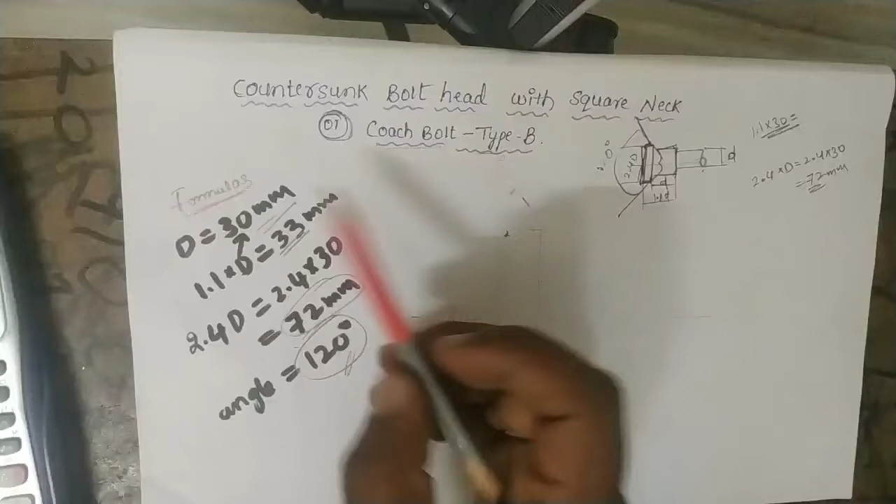Countersunk bolt head with square neck, or coach bolt type B. Both are the same. This is the diagram.

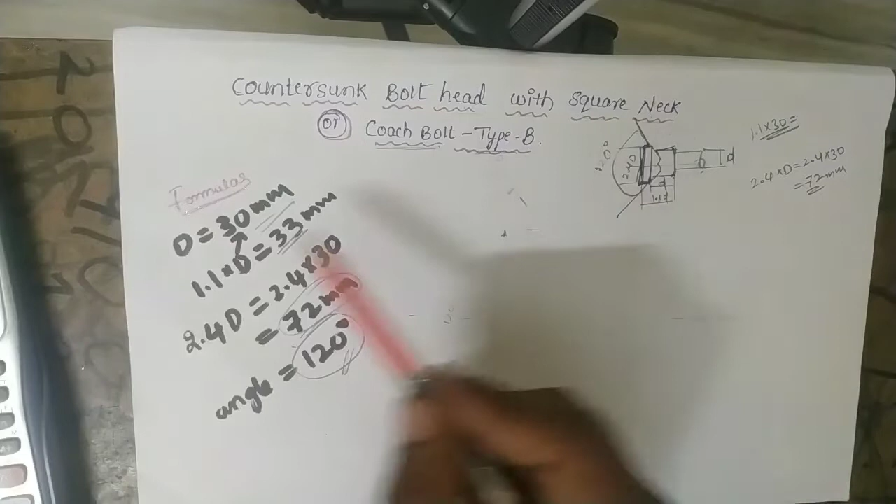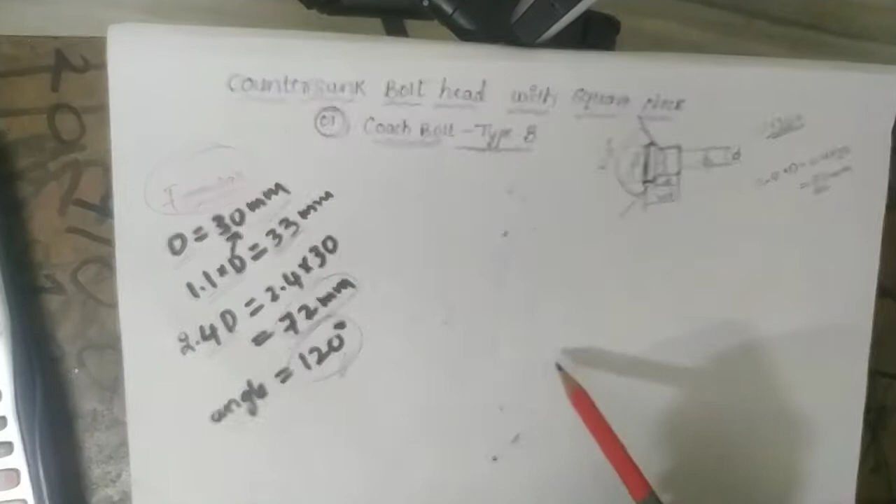Diameter of the bolt equal to 30 mm. From here to here is 1.1 into D, and total height is equal to 2.4 into D. Head height equal to 2.4 into D. So D equal to 30. Substitute D value in 2.4 into D, I got 72, and angle is 120 degrees.

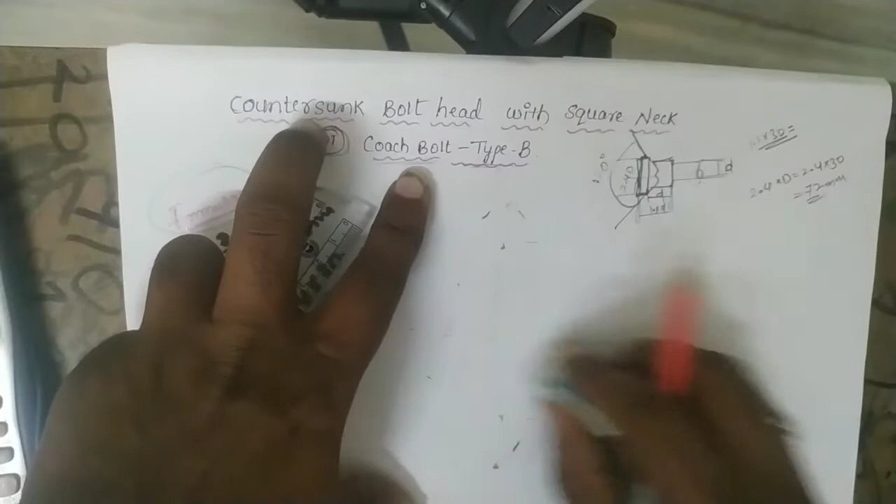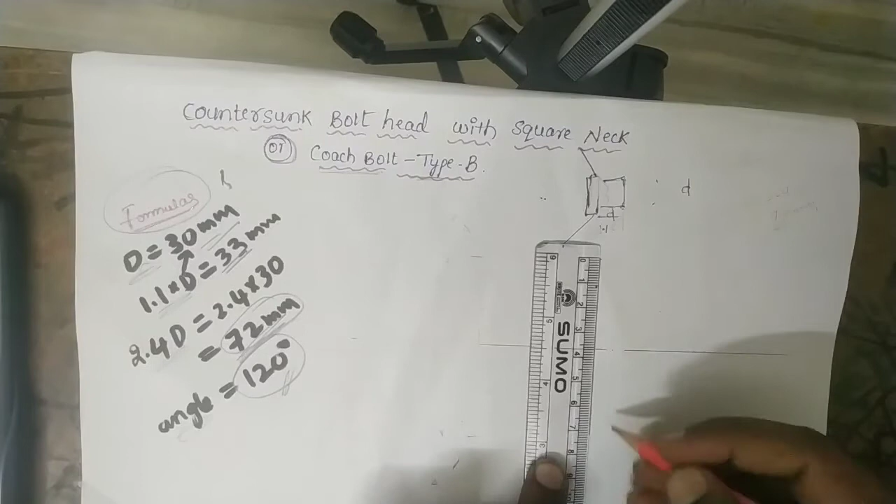This is the constant. See the procedure how to draw the countersunk bolt head with square neck. Draw one center axis, then draw the 72 mm line. Take 36 and 36, total 72. 36 mm above the center axis, and again take 36 mm below center axis.

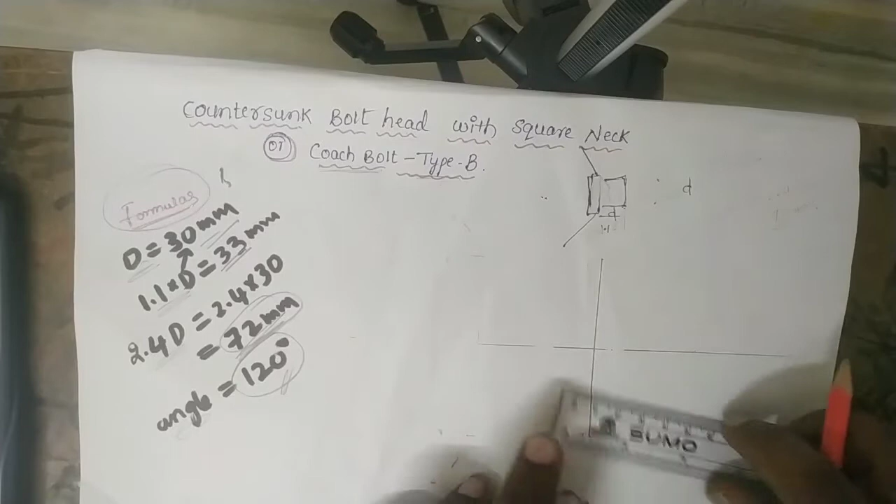This is the width of the head, 3 mm. The width of this head equal to 3 mm, and draw like this.

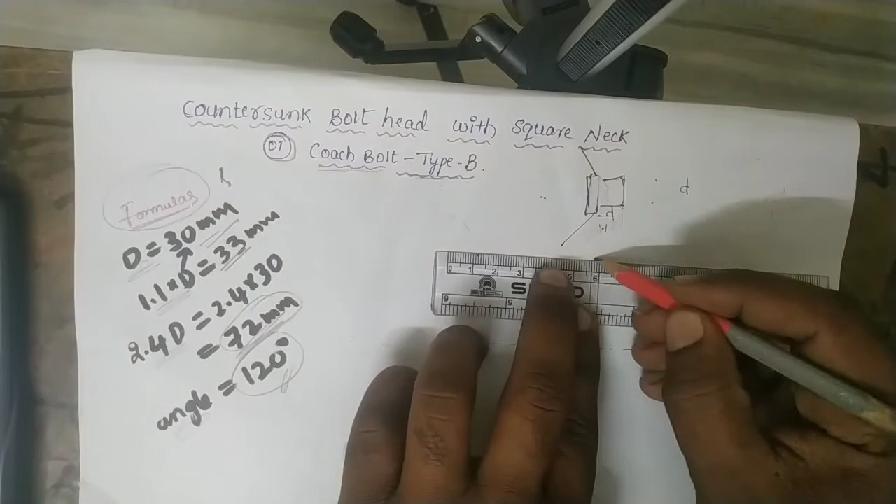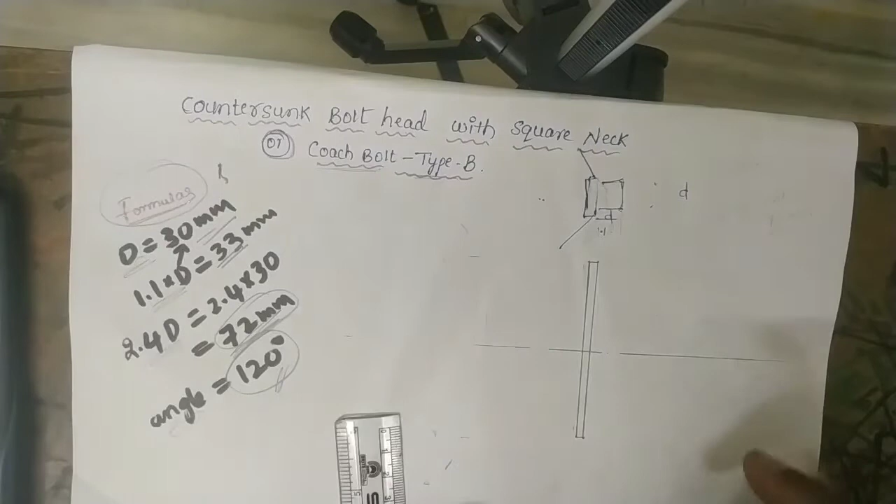So this is the total height, 72 mm. Clear? 2.4 into 30 equals 72.

Take protractor and measure 120 degrees like this. This is the position of protractor. Measure 60 degrees from 90: 1, 2, 3, 4, 5, 6, that is 60.

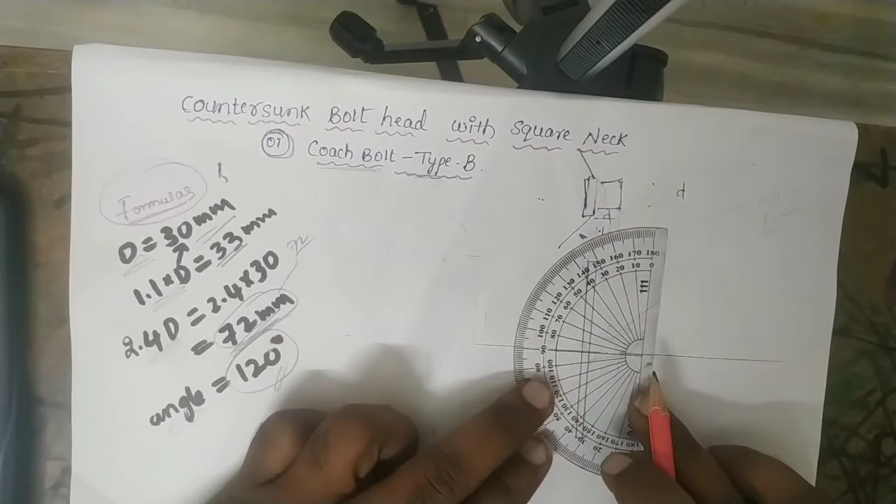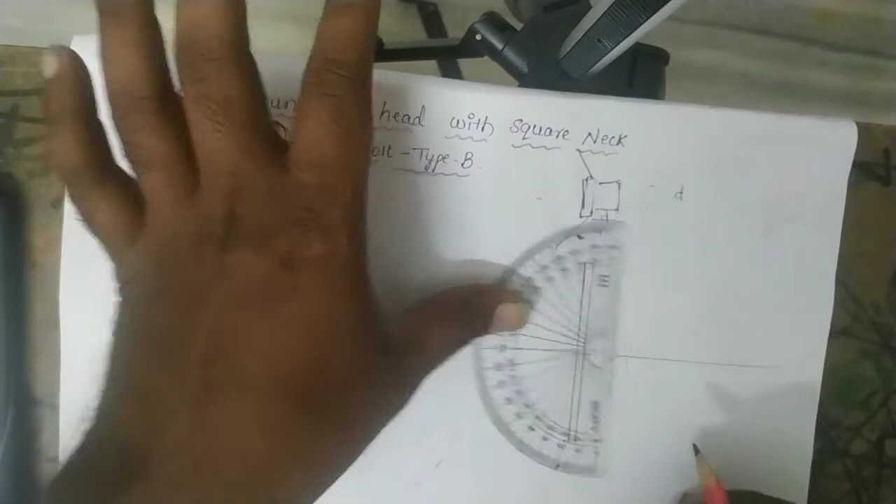Again take 60 below: 10, 20, 30, 40, 50, 60. So 60 plus 60 is 120. Draw like this.

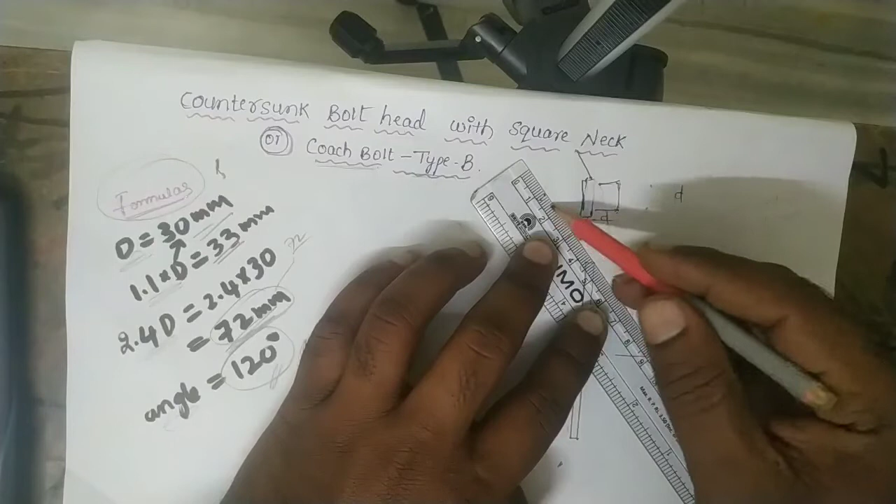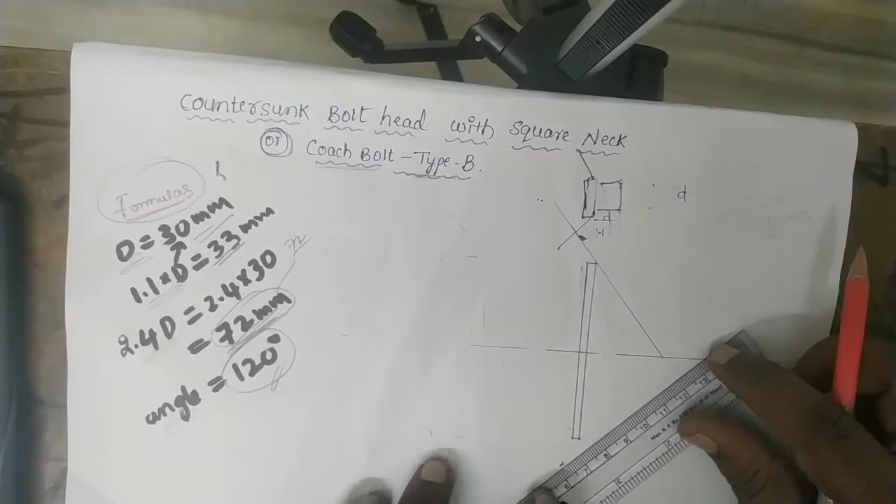This line is passing through the top corner. You should draw a line passing through the top corner like this, and again draw this 60 degrees line passing through the bottom corner like this.

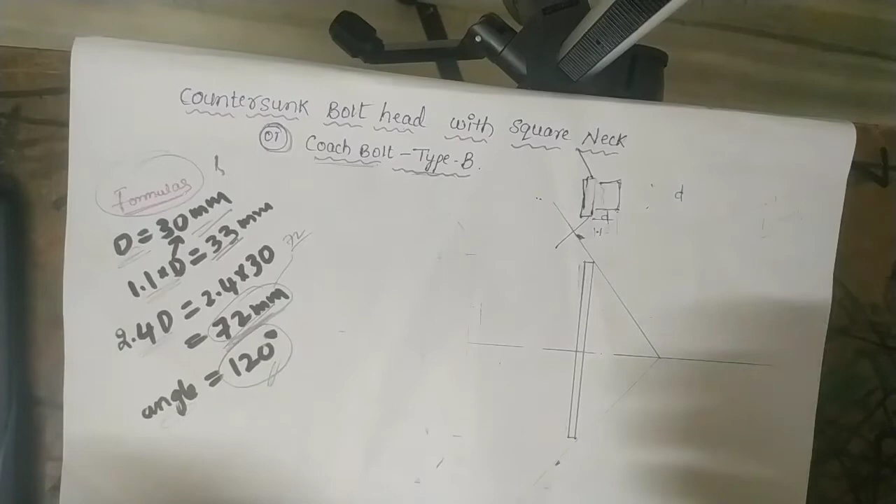From here to here the line must compulsorily touch as you draw it. Meaning you should draw the inclined line passing through both the top and bottom corner.

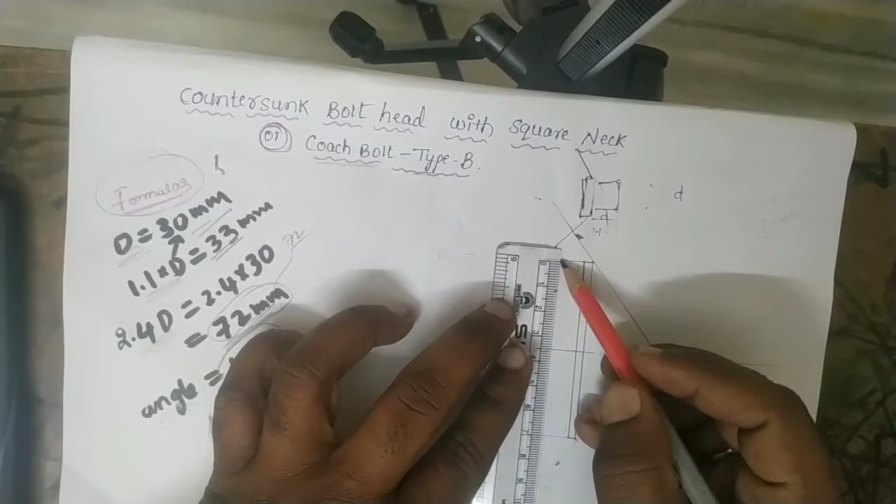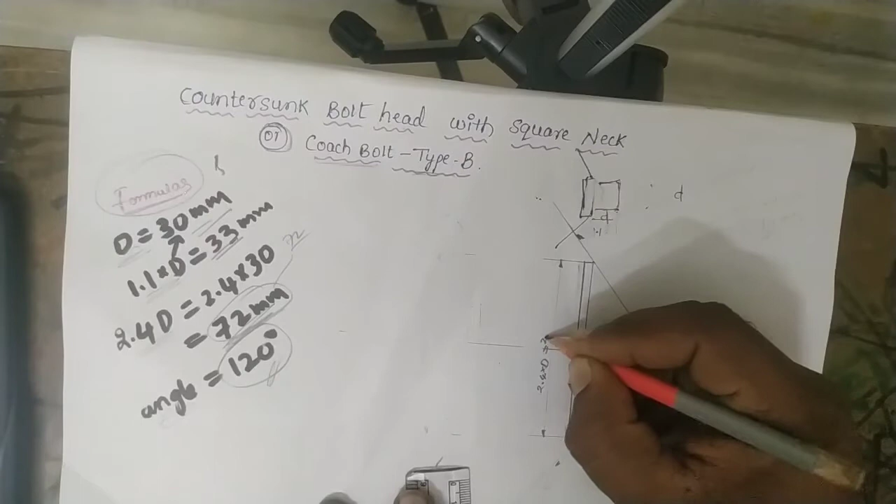This is 2.4 into D, height of head. This is the height of head, 2.4 into D, where D equal to 30. Total height is 72. Take 36 mm from the center axis, center line at the bottom and top.

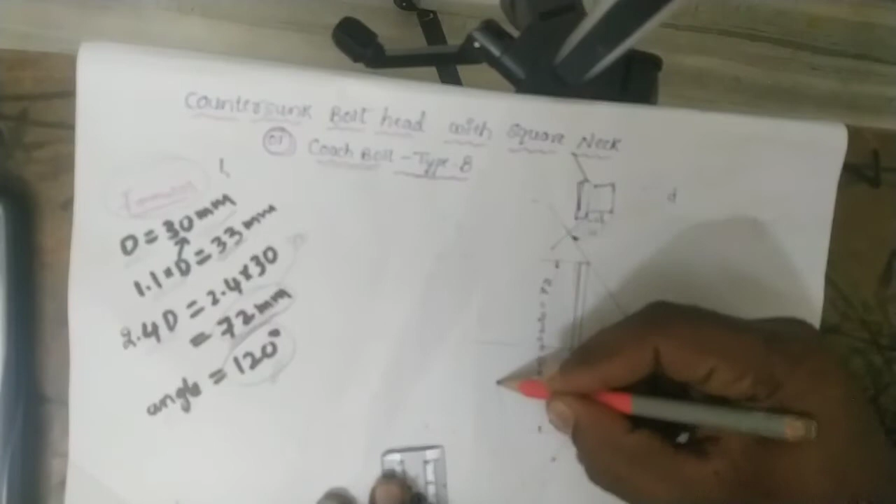So this is the 120 degrees, representation of 120.

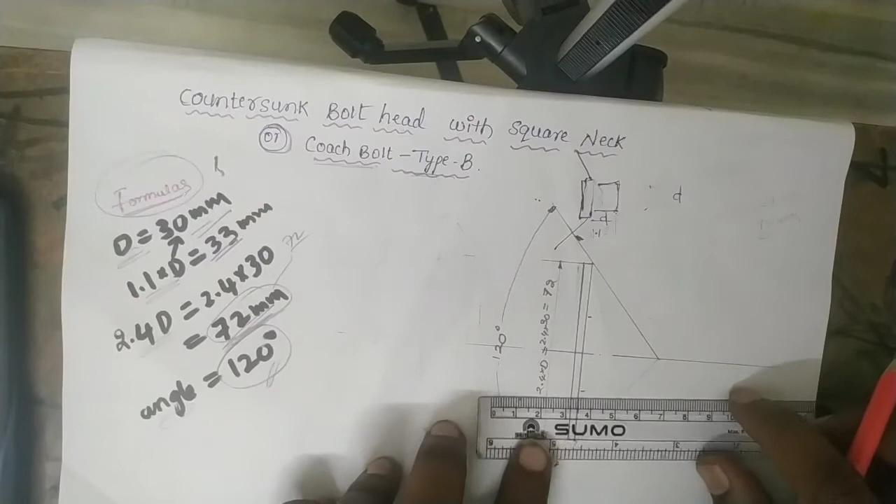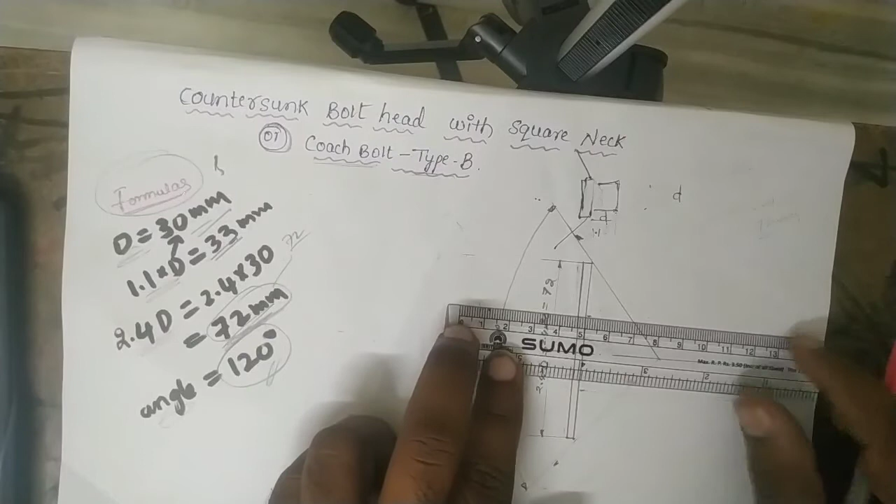Take diameter D dimension, 30 mm. Please take 15 mm above the center line and below the center line. 15 plus 15 equal to 30. Draw horizontal line. There is no given length for this bolt.

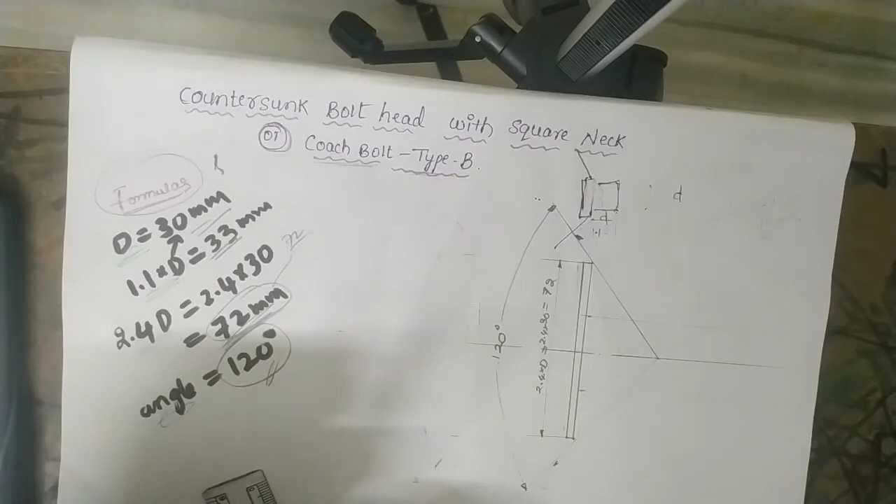Draw two horizontal lines like this. After completion of this one, you need to draw this square portion, but see the procedure how to draw the square portion.

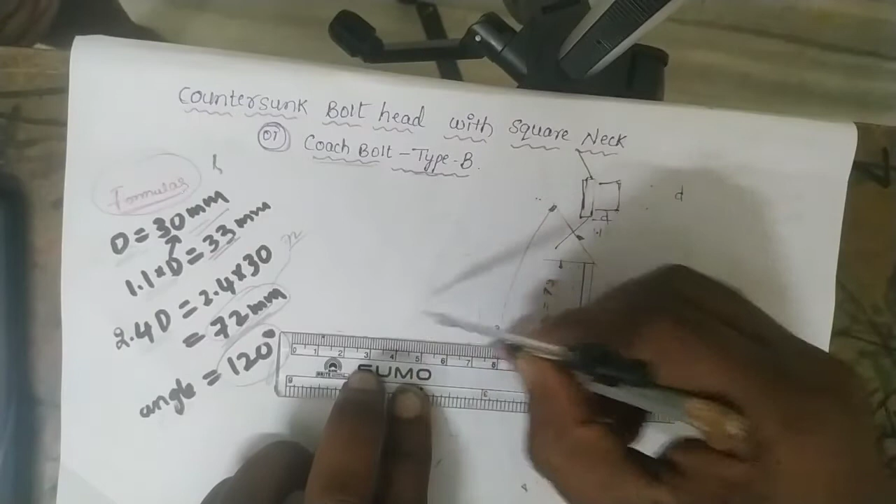Take 36 mm and draw circle, 36 mm radius, and draw circle like this.

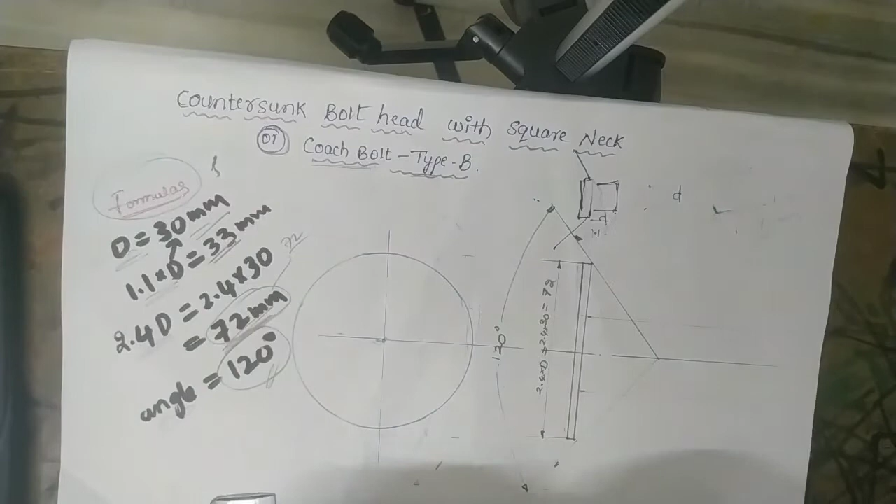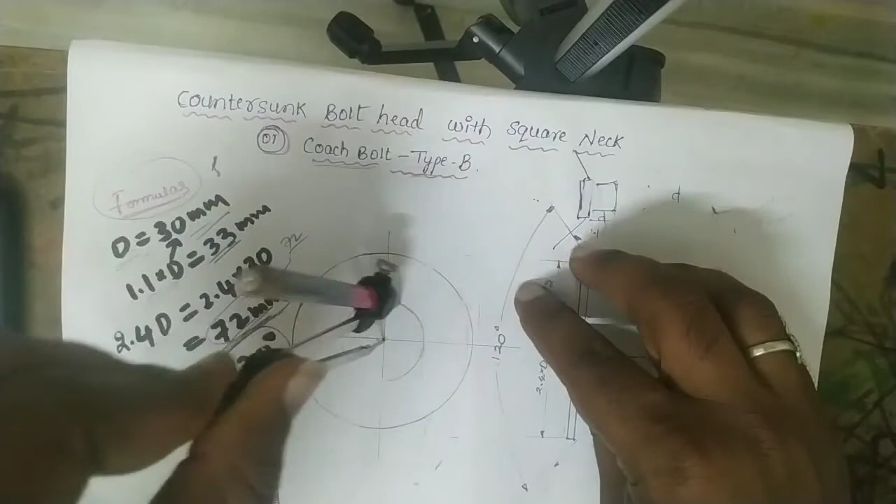Draw the center axis of that circle. After completion of that one, you need to draw another circle. This circle diameter is 30 mm, so take radius 15 mm and draw the circle like this.

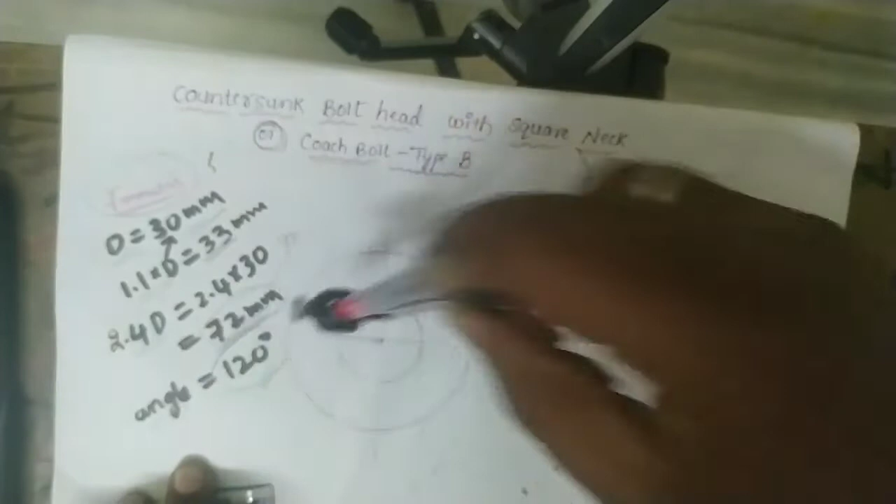So this is the 30 mm diameter circle.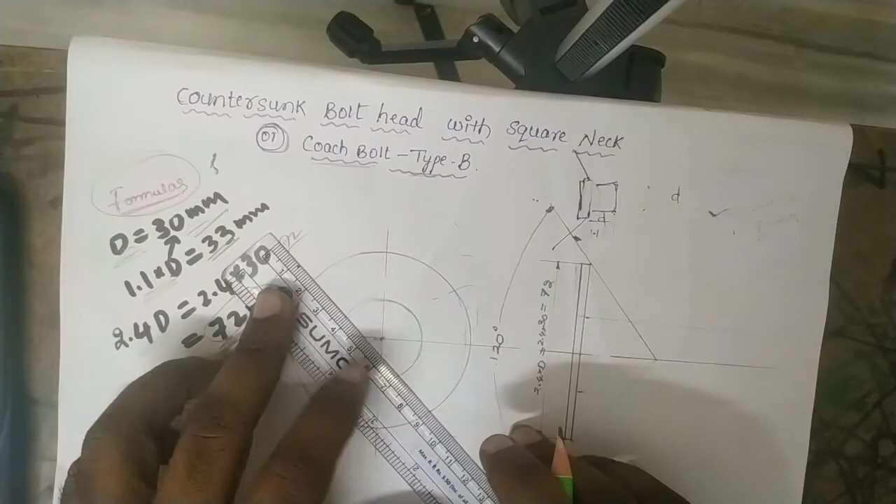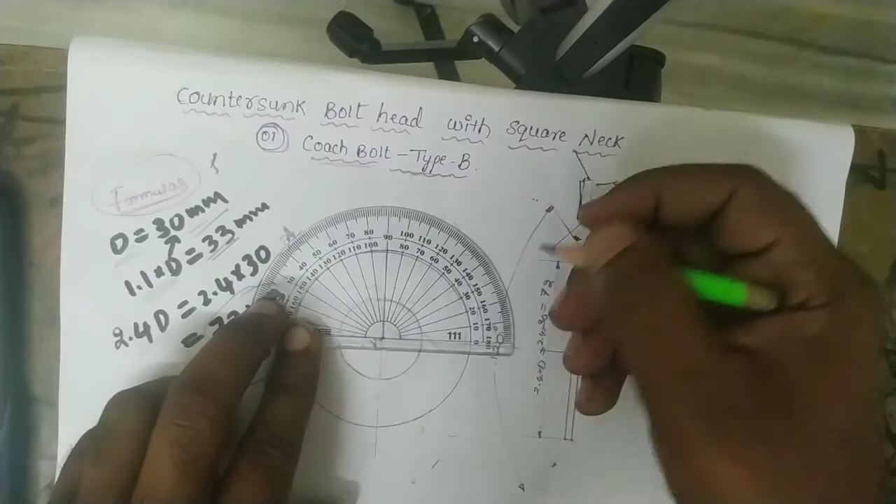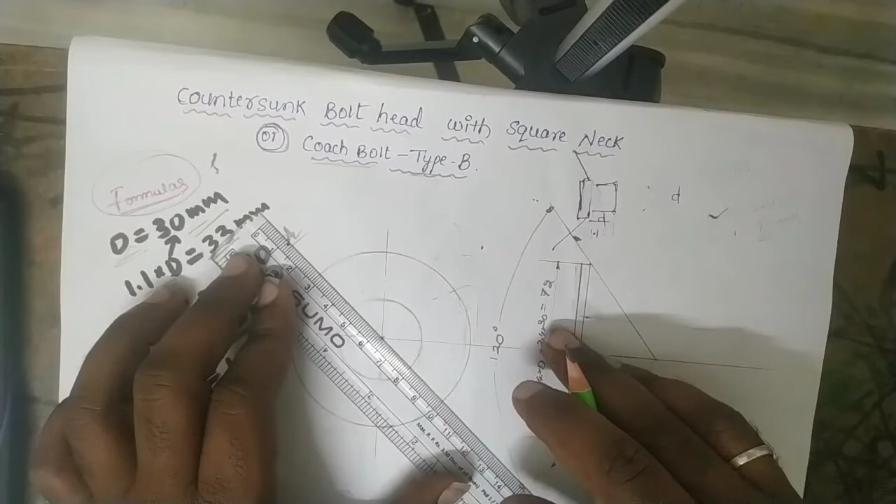After that, measure 45 degrees like this, 45 degrees and 45 degrees. This is the position of the protractor. Take 45 and 45 on both sides and draw the lines like this. Draw 45 degrees line like this.

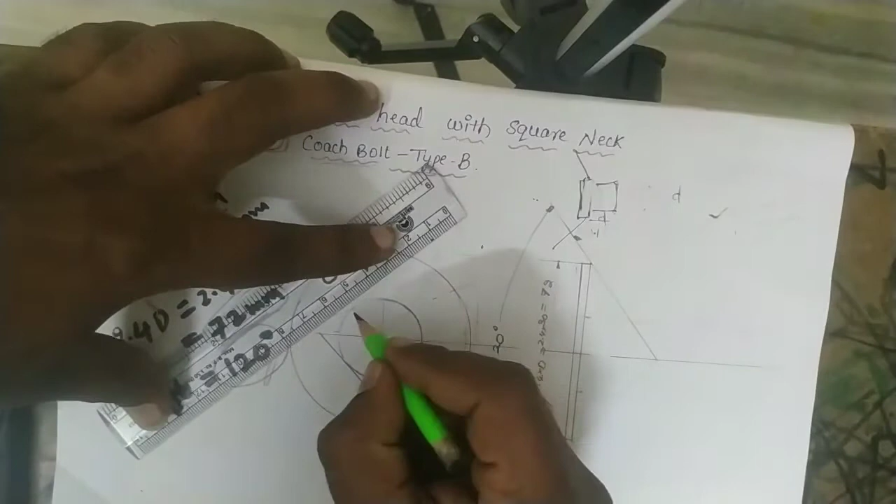After completion of this one, draw square box like this. Yes, this is the square.

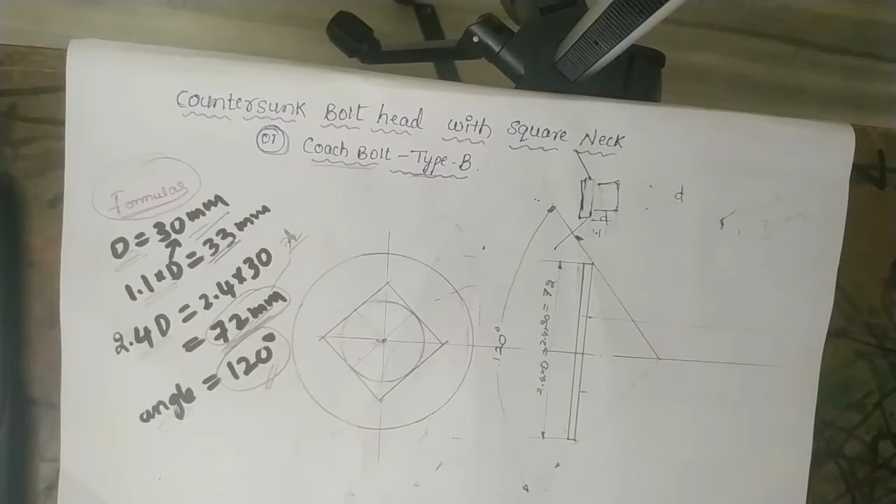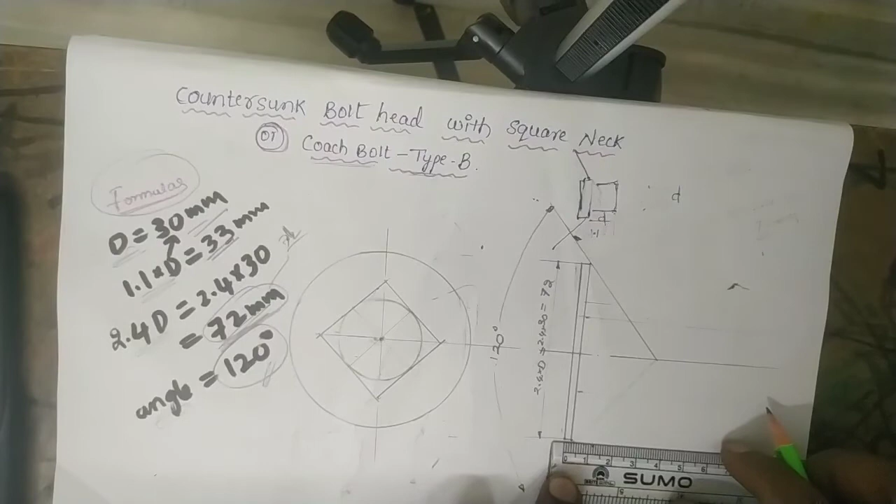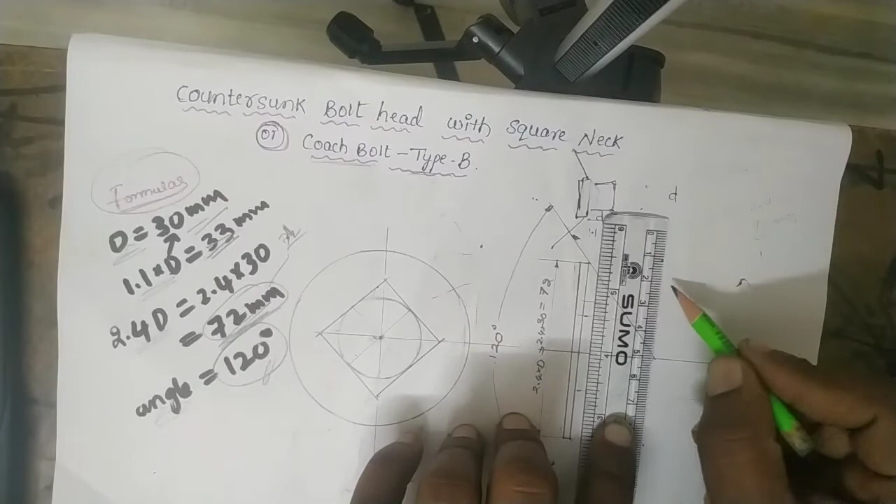Please project this square height. Please take from this point to this point, which is 33 mm, from the starting line of the head. Draw one vertical line at 33 mm like this.

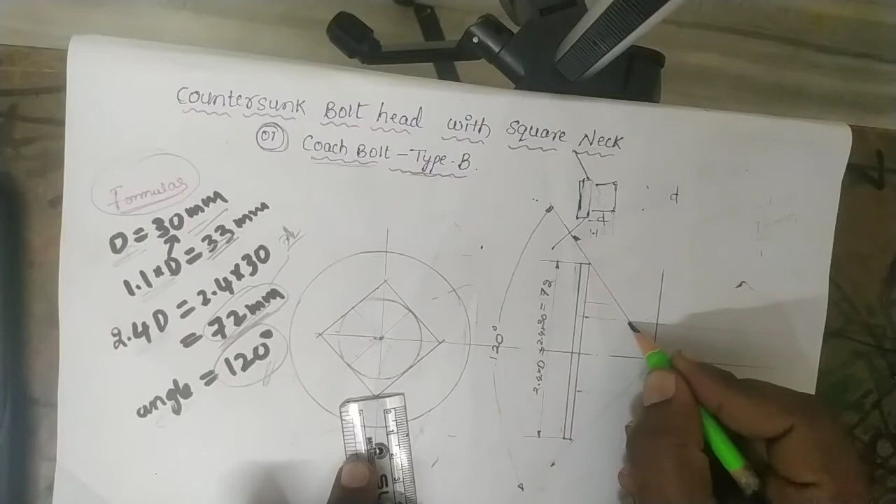Draw the curved portion, draw the curved portion like this.

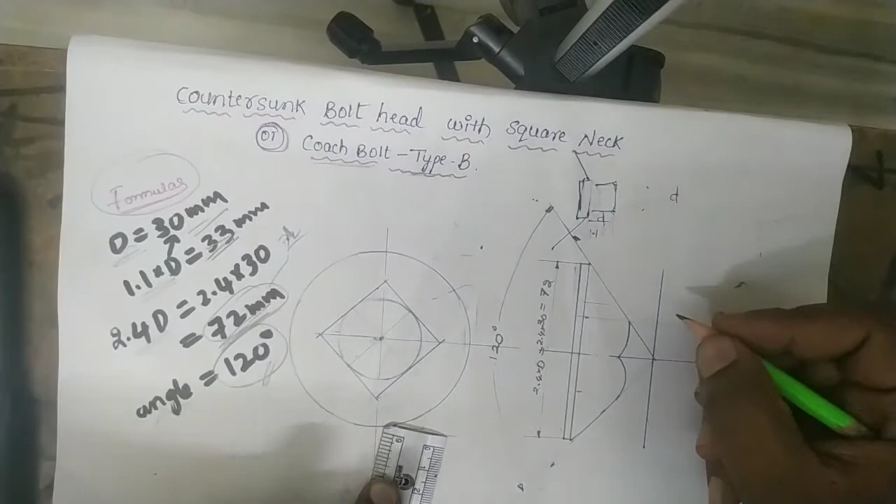After completion of that, please project the square portion like this. This is the square height from this point to that point.

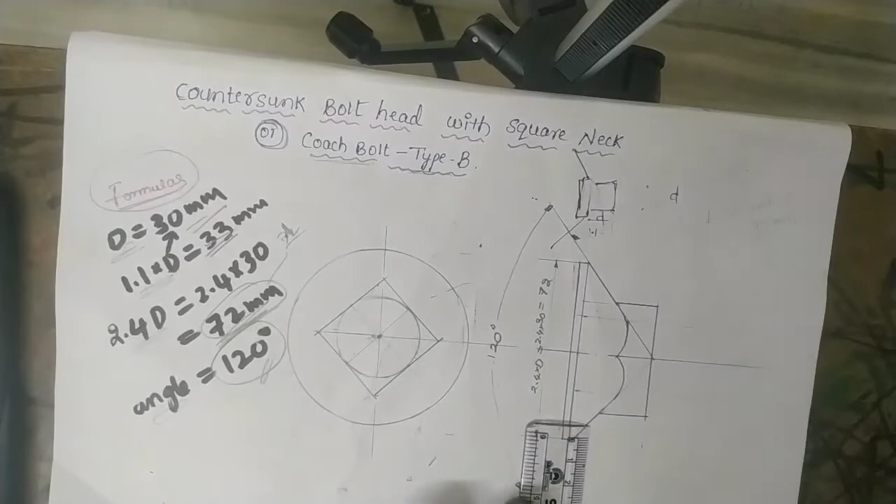After completion of this portion, draw the diameter D portion.

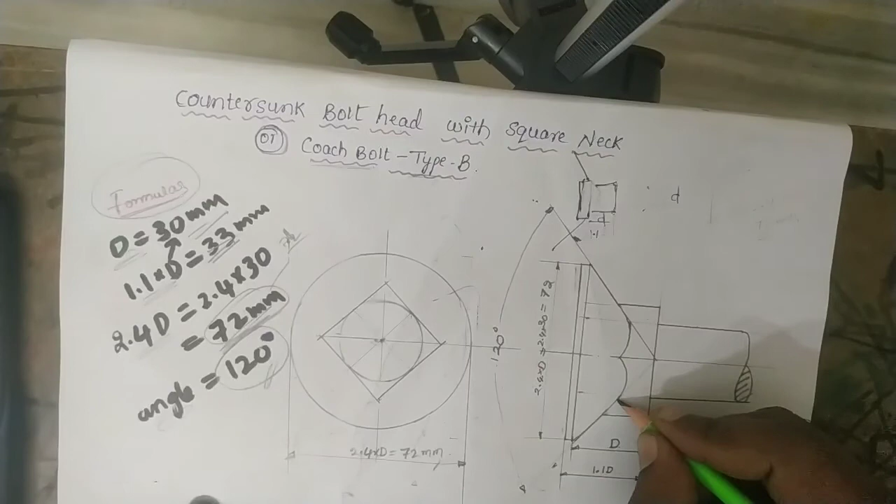You should represent all the dimensions. Okay, see, this is the complete diagram of countersunk bolt head with square neck.